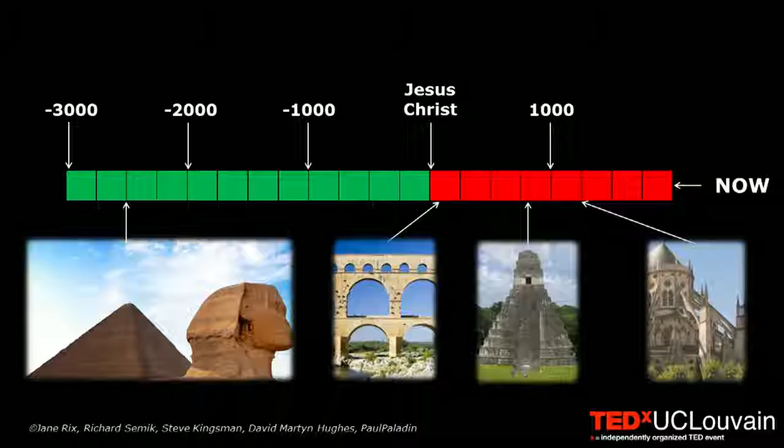What are the common points between the Pyramid of Cheops, the Pont du Gard built in France in the 1st century AD, the Maya temples of the 8th century, and the Gothic cathedrals of the 12th and 13th century? Well, there are many, but in particular, a huge human workforce, a very long construction time, and very little consideration for human rights and the human condition.

Then, in the 16th century, a first revolution happens with the birth of a man who will change the face of humanity, Galileo. Why do I speak about Galileo? Because Galileo is not only one of the fathers of astronomy, he is also the first one to develop the strength of materials. So, from Galileo on, builders would no longer rely on empiricism, but on a real knowledge of the physical concepts.

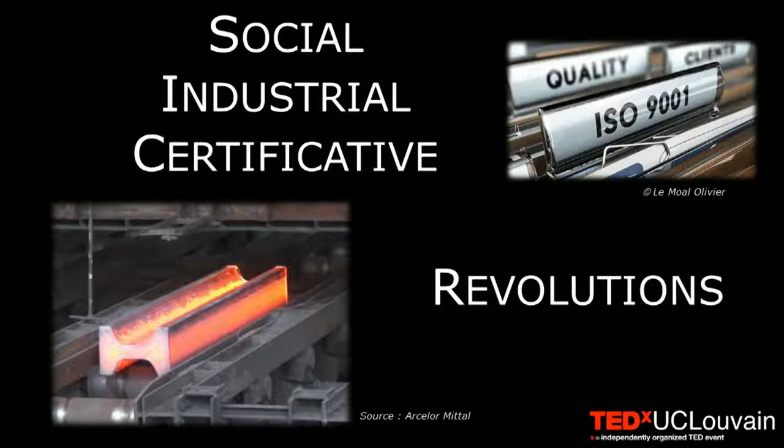A few other revolutions: social revolutions, let's say those of the 18th century. Industrial revolutions, with, for instance, the systematic use of steel since the 19th century. But we could also talk about many things: the large-scale prefabrication of concrete, the fantastic developments of construction machinery, etc.

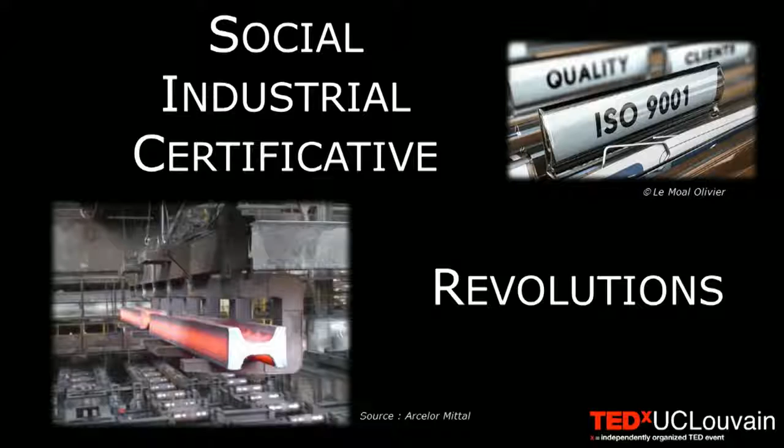Certificative revolutions. ISO certification, quality control, Eurocodes are essential to guarantee a good quality of the construction materials, the execution processes, and the design processes.

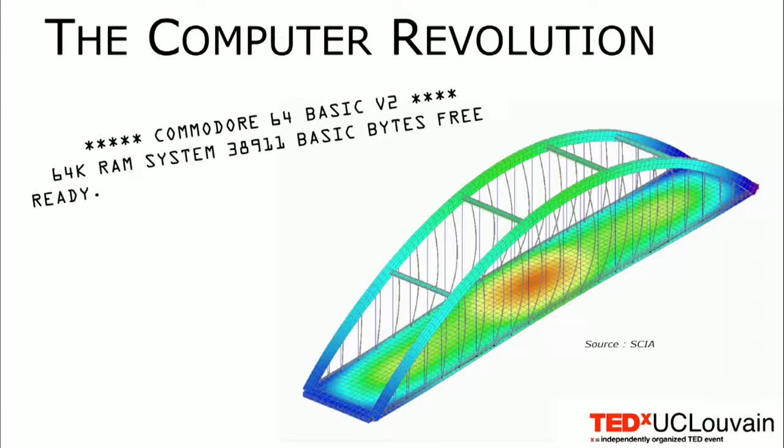Then the next stage, the computer revolution, not so far away from us. The computer revolution has allowed us to take full advantage of the scientific advances since Galileo. One example of that is the finite element method, thanks to which we can today produce software able to digitally model and test very complex structures. This would have been impossible almost 35 years ago.

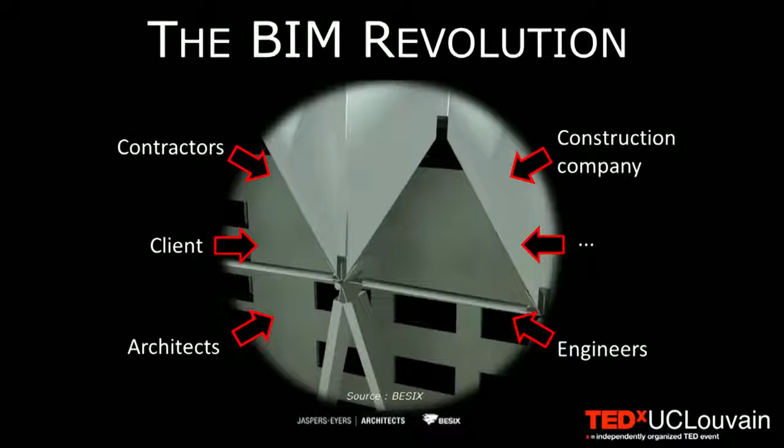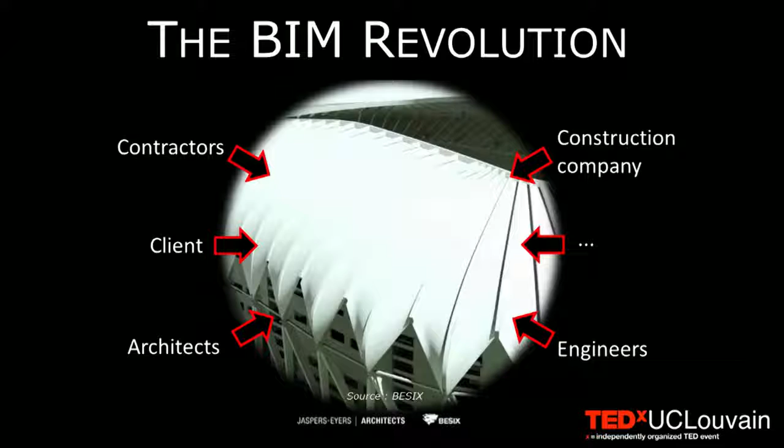The next revolution, it's happening now, the BIM revolution. What's BIM? BIM stands for Building Information Management, and it focuses on the management of building information during its entire life cycle, from the design process to the dismantling.

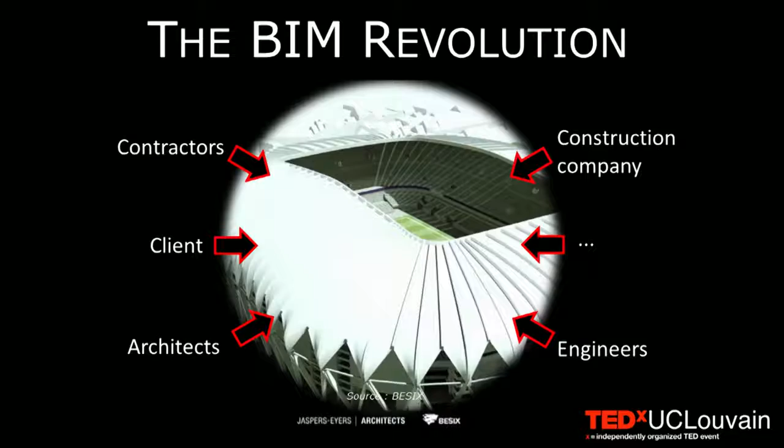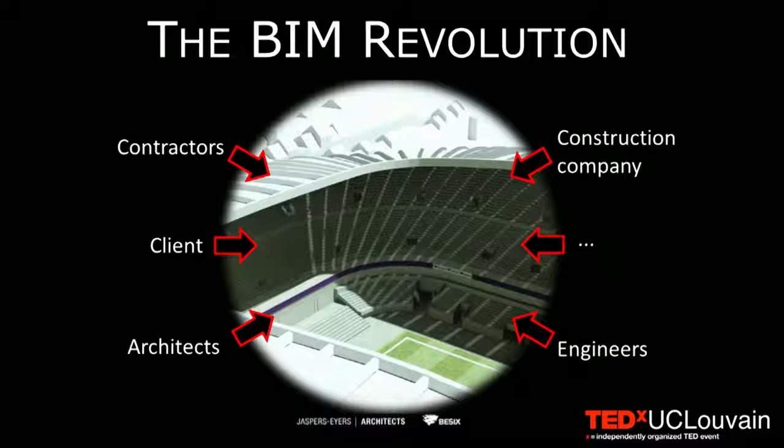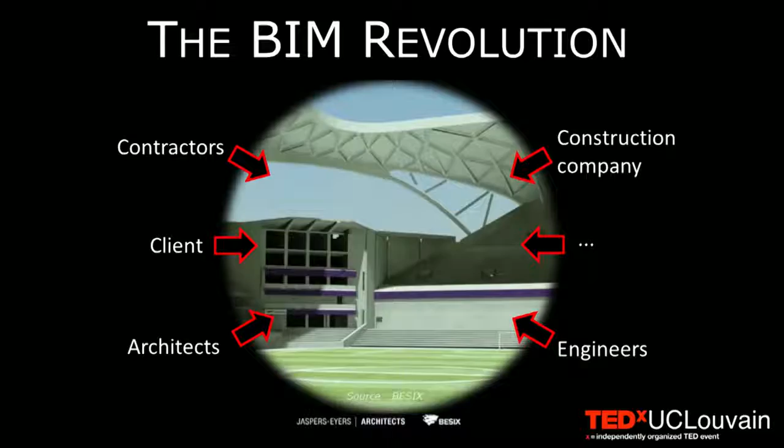Such a rich database allows all the stakeholders of a construction project, the contractors, the architects, the engineers, everyone, to better coordinate by using a central, unique, and constantly updated source of information. Practically speaking, everybody works on the same 3D model, and each construction element, a column, a beam, a door, is tagged with information such as the color, the price, the construction date, the placement date, the strength, etc.

Well, obviously, BIM is necessary to ensure a good quality of the construction processes. But it's not sufficient. Why? Because BIM doesn't avoid the negative impacts of many factors, such as lack of communication between the workers, lack of skilled labor, cost of safety devices, accidents, bad weather conditions, etc.

So how can we address this? Well, let's get some inspiration from nature.

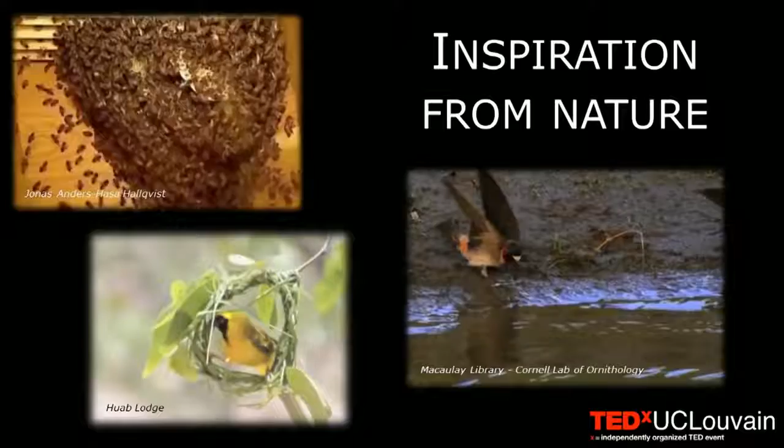If you look at this swallow, it is building her nest by constantly flying back and forth to transport and assemble mud and twigs into a structure capable of supporting eggs and offspring. Other flying animals use a similar way to build very complex forms, such as bees or those birds from Africa.

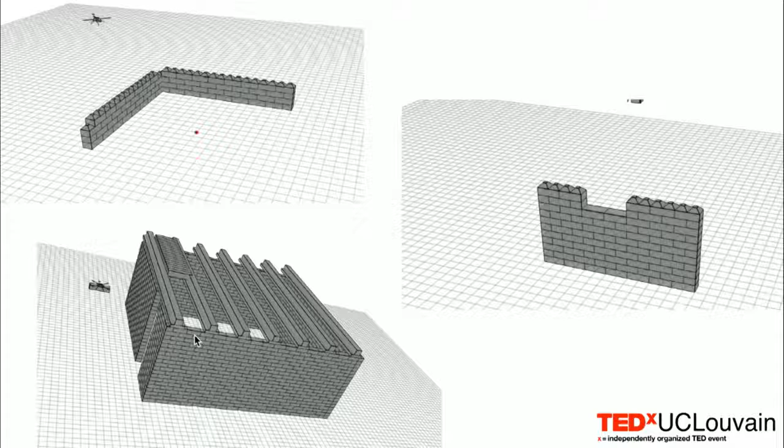So why couldn't we do the same? What do I mean? Why couldn't we use flying robots that would assemble many light construction elements, just as bees or birds do?

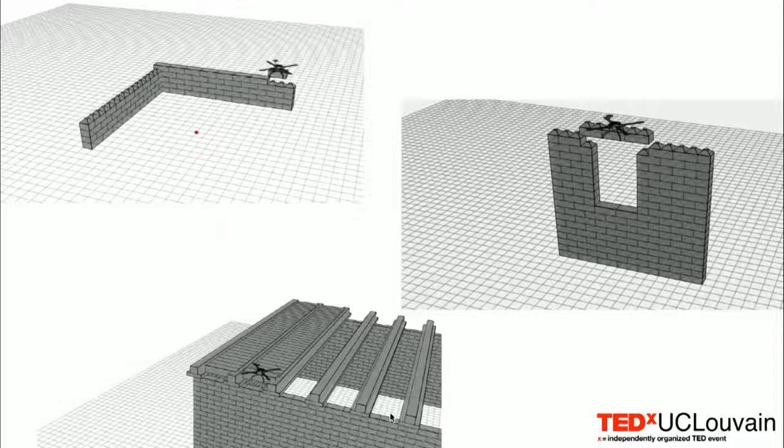So let's imagine that one or several drones would build this structure and put the bricks next to each other at the very right spot, in a completely automated process.

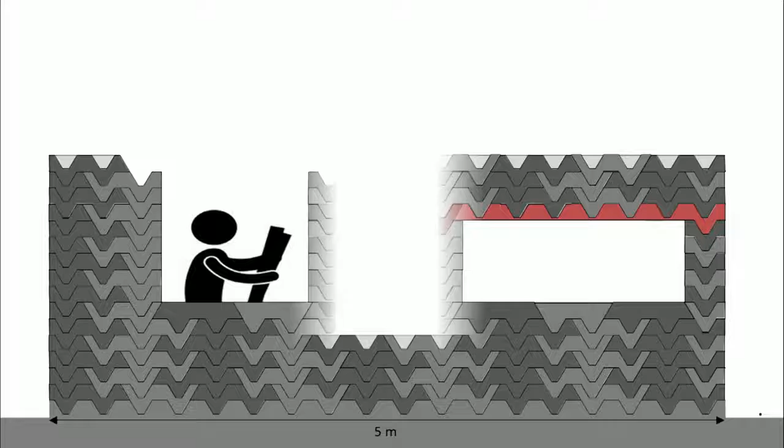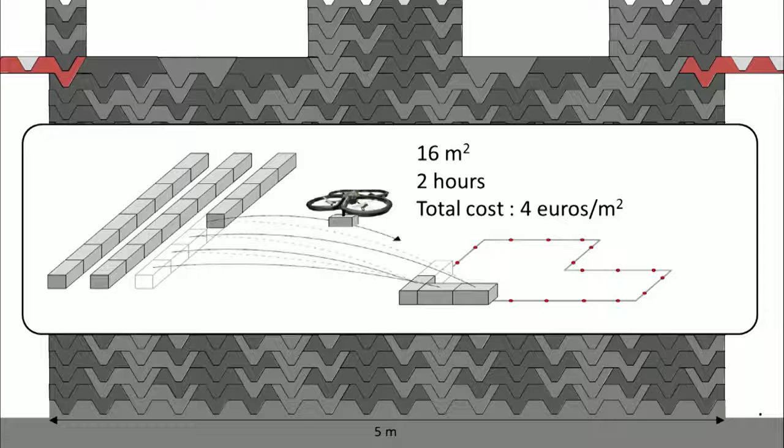This is another example: a masonry of about 16 square meters. We think it could be built in less than 2 hours with 2 drones, for a total cost of 4 euros per square meter.

Of course, on one hand, this will probably reduce the available work on construction sites. But on the other hand, it will probably also create employment in the robotic sector.

So what's the coming revolution, the one we are working on at the UCL? Imagine a BIM model connected to a cloud of drones, via a system that would translate the model into drone-compatible instructions. That's what I call robo-numerization of construction.

Don't look in the dictionary, it's not yet in it, by the way. Of course, such a way of considering building would require us to tackle a few challenges first.

The first challenge is to be able to accurately position the drones in space. But this is a problem that already finds solutions today.

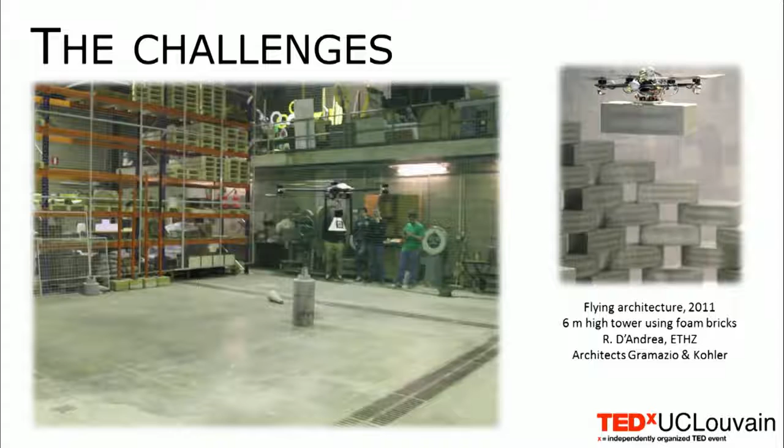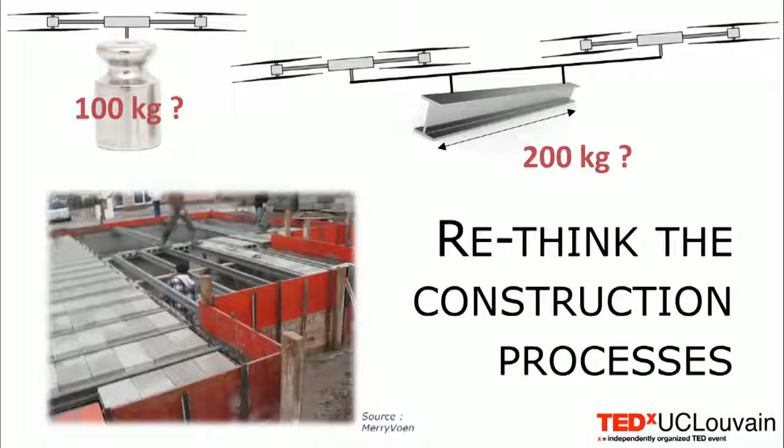The second challenge is to rethink the construction processes. Why? Not only because of the positioning problems, but because we think a drone will never be able to carry masses of thousands of kilograms on construction sites. Even hundreds of kilograms seems too much, unless it becomes a heavy, noisy, and probably dangerous helicopter. Therefore, we think we should limit the masses to 100 or 200 kilograms.

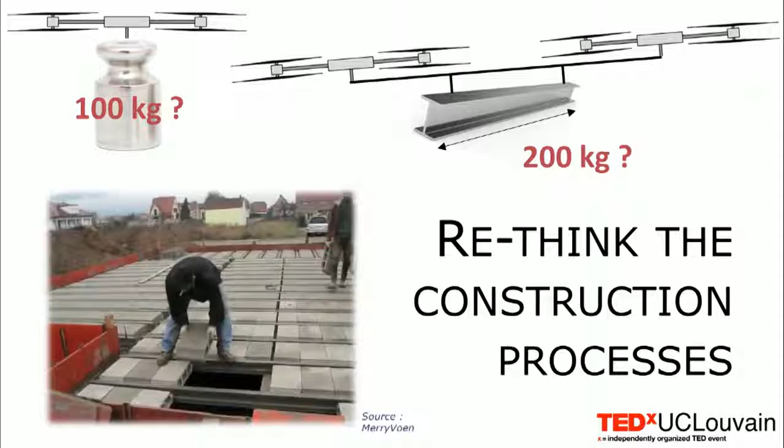Currently, solutions exist to build big structures with small elements. What you see on this film is 2 workers assembling a whole concrete slab with small and light precast concrete elements. Actually, it's a construction process that is not often used because it is slow.

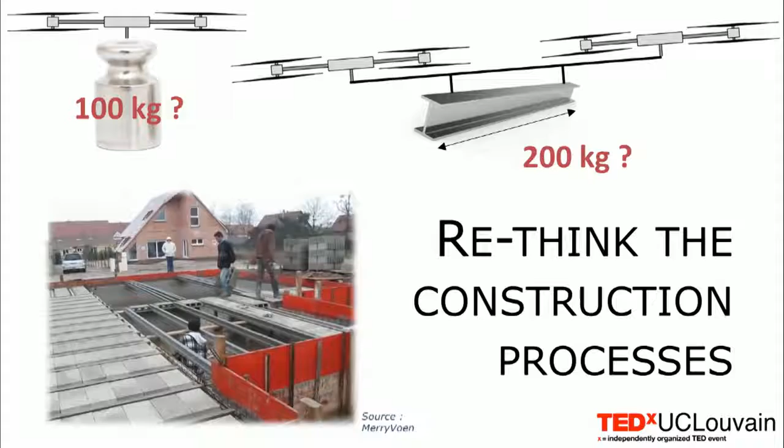But if 2 workers can do it, 2 drones can do it, and much faster. So...

You have seen many changes in the way we've been building since the pyramid of Cheops, and probably many other changes will come with the arrival of robots.

In our everyday life, robots should make the world safer and more comfortable. Let's hope so. On construction sites, they should help us build more efficiently, faster, and yes, with better profitability.

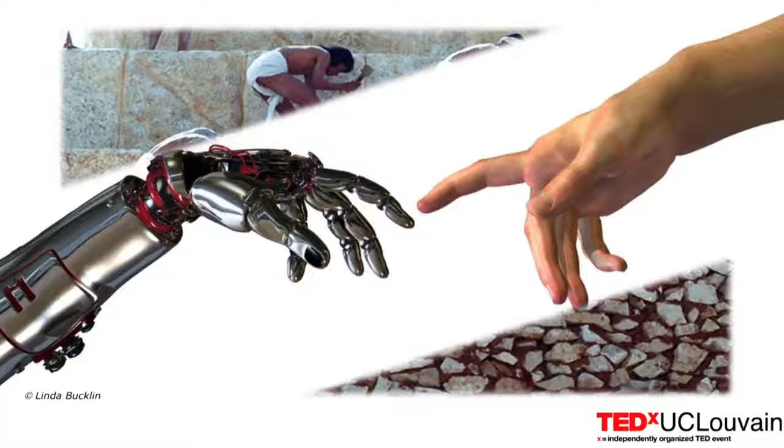But at the beginning of this talk, I was speaking about a few common points between old monuments. Do you remember? One of them was no consideration for human rights and the human condition. So my greatest wish is that this coming revolution, the coming of robots, will raise the standard of living of everyone. I thank you for your attention.